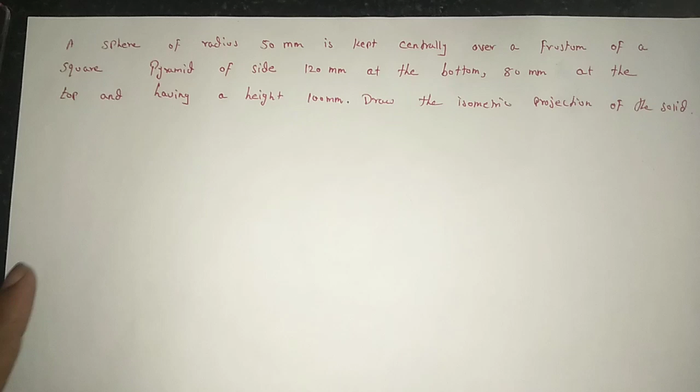In this video we are going to see one problem from isometric projections. Problem: a sphere of radius 50 mm is kept centrally over a frustum of a square pyramid of side 120 mm at the bottom, 80 mm at the top and having a height 100 mm. Draw the isometric projection of the solid.

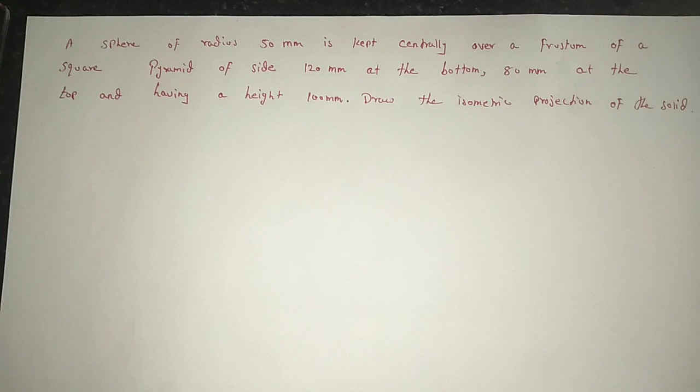They are asking: draw the isometric projection of the solid, combination of solids.

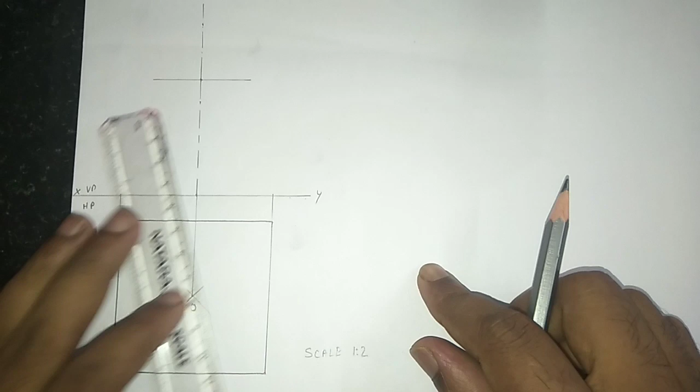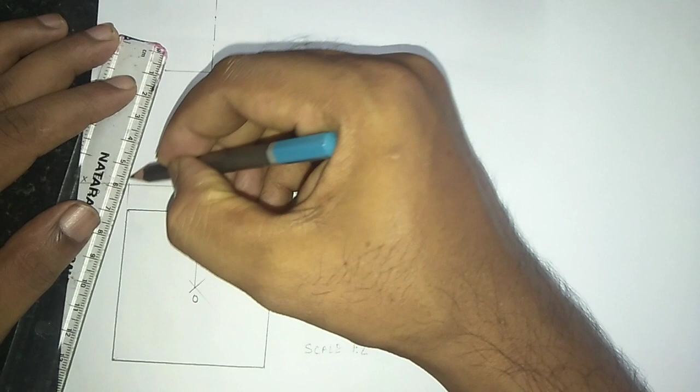Next I am going to connect these portions from this top of the frustum to the bottom of the frustum. So I connected the line. So now the front view of the frustum is over. Okay, so in the top view also we need to mention this top portion of the frustum in this diagram.

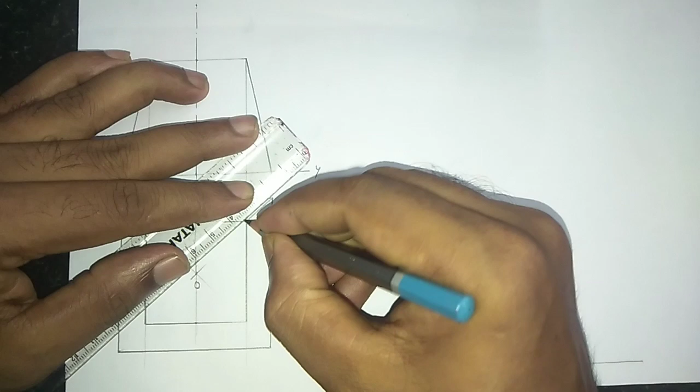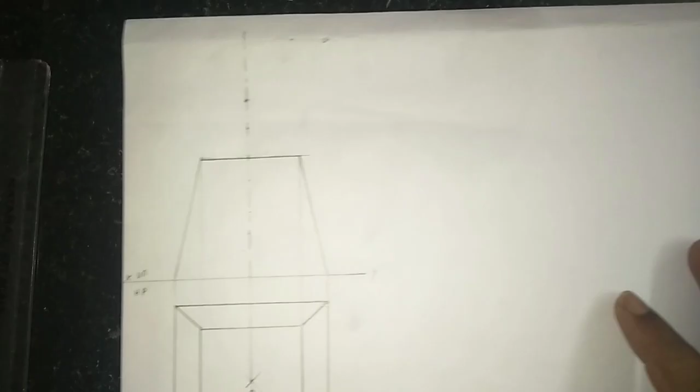So now the frustum portion, front view and top view is completed. Now over the frustum, the sphere is located. The radius of the sphere is 50 mm. Our scale is 1:2, so 50 divided by 2, 25.

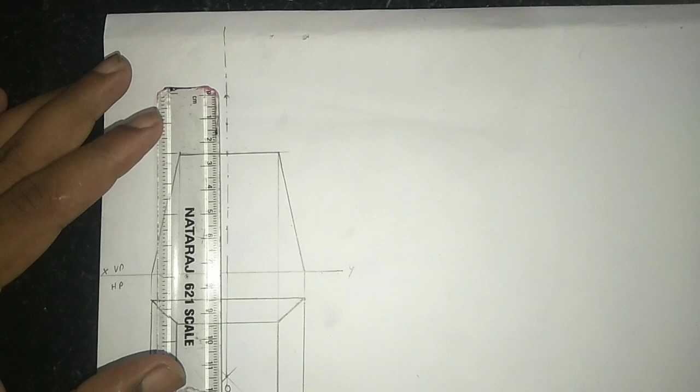Take the value of 25 radius in the compass and draw the sphere over the top of the frustum. Okay, so like this we draw the sphere over the top of the frustum and mention the dimension.

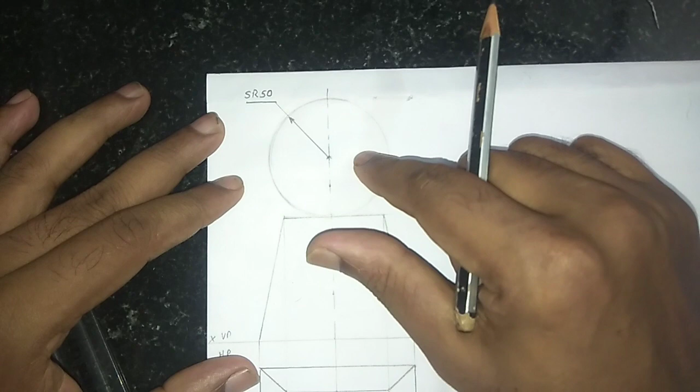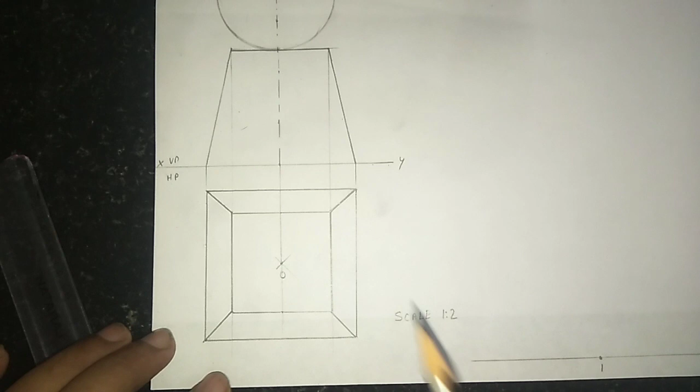The sphere radius 50 is the original dimension given in the problem. And next in the top view also we need to mention the sphere. Here in the top view the frustum only is available. So now we are going to draw the sphere over the frustum on the top view. So take the radius 25.

So place the compass in the center and draw the circle.

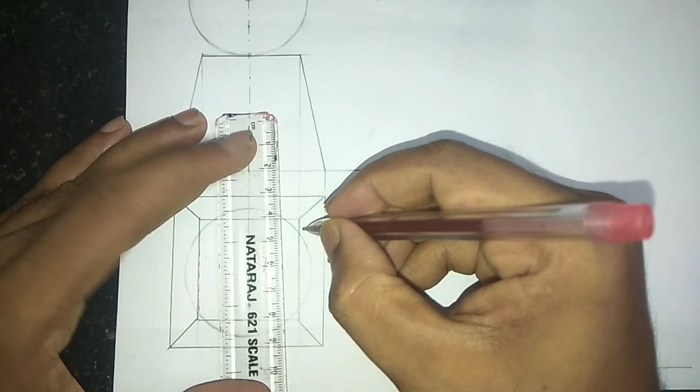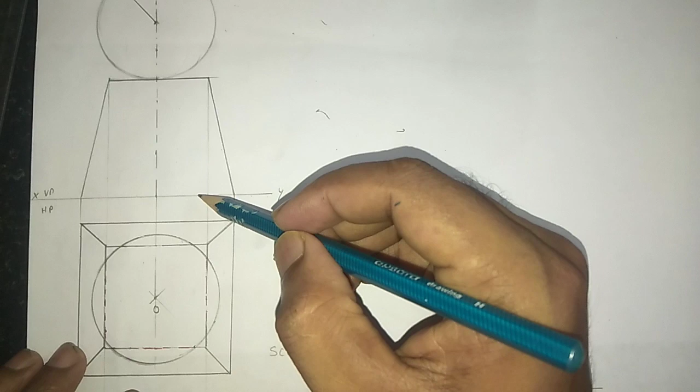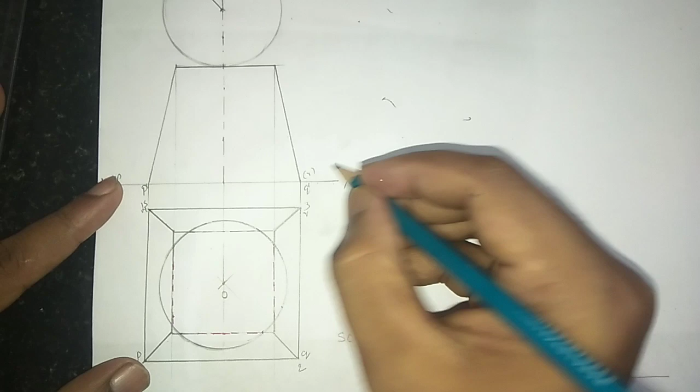So first draw one straight line, mention one point and give the number 1. And here also we are going to give the number on all the corners. So here 1, this is 2, 3 and 4, and also here give the naming on these particular corners. Here it is considered P, the base portion of the prism, P, Q, R and S. So here P visible, Q visible and R is invisible. P dash, Q dash, R invisible, R dash, and here S is invisible, S dash is invisible.

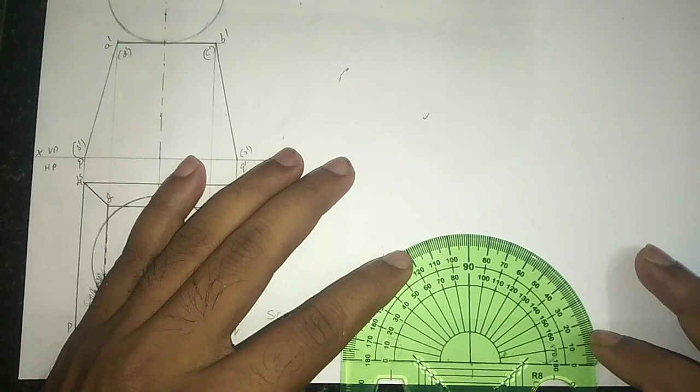And the top face of the frustum, here I give the name A, B, C and D. Here A visible, A dash, B dash, C dash is invisible and D dash is invisible. And here the center of the sphere is O dash, and here the center of the sphere is O. And now we are going to draw the 3D view. From the point 1 we place the protractor and take an angle 30 degrees on both sides, and connect the points by a straight line.

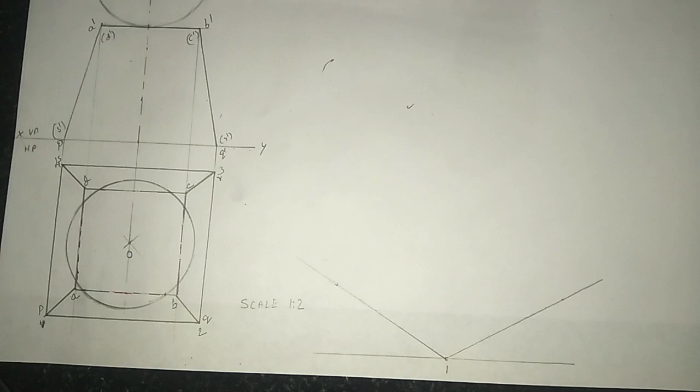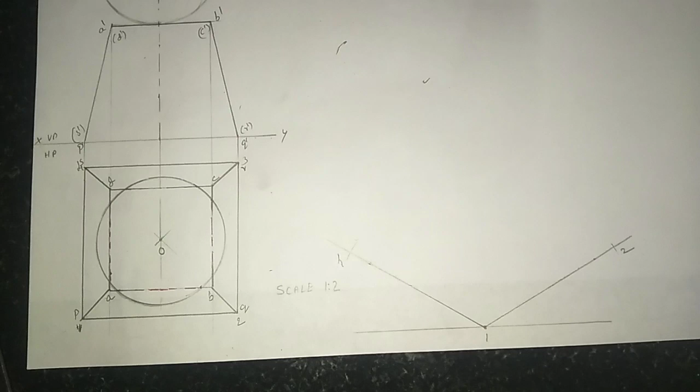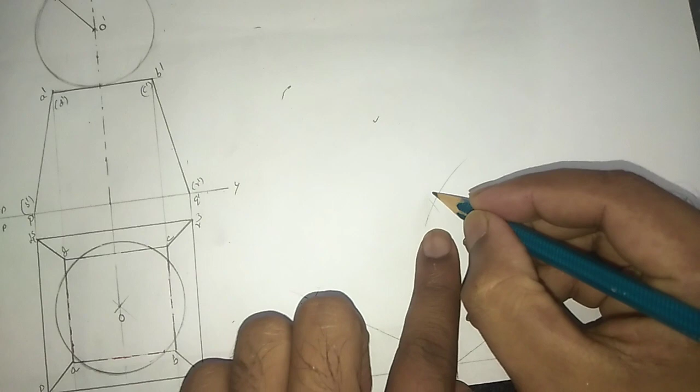And now measure the distance from 1 and 4, place the compass at point 1 and make the arc on both sides. And now we get the points 4 and 2. Here it is a square pyramid, so the bottom face has all sides of equal distance. So place the compass on 2 and make the arc, and place the compass on 4 and make the arc, and give the point number 3, and connect the points 3 and 4, and 2 and 3.

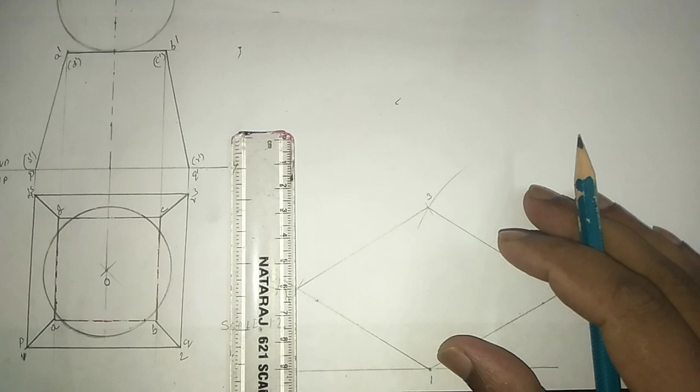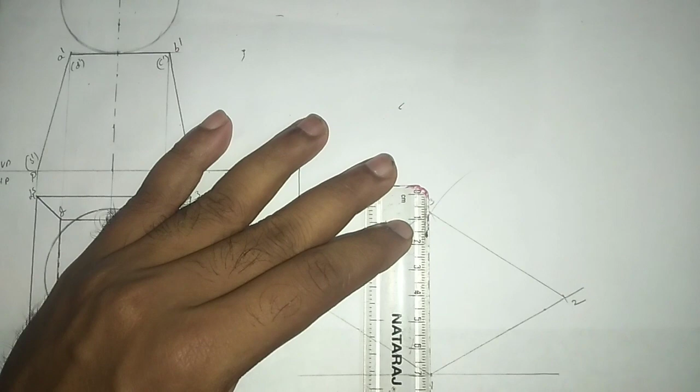Now from all the points we need to draw one vertical line. The height of the line is the truncated height of the frustum of the pyramid. The height of the frustum of the pyramid is 100 mm. That is given in the problem, but we reduce the scale. The scale is 1:2, so for 50 mm height we need to draw the diagram. Draw the line 50 mm from all the points. So from all the points the 50 mm line is drawn.

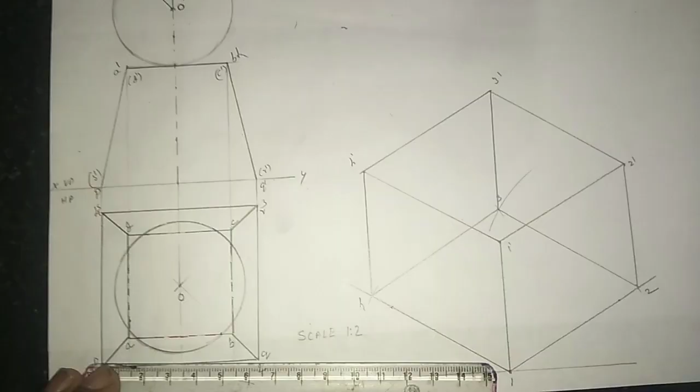So here this is the point number 4 dash, this one is 1 dash, this one is 2 dash, this one is 3 dash. Now connect all the points 4 and 3, 2 and 3, 1 and 2, 1 and 4. So in the diagram the base portion of the pyramid is drawn. Point 1 is P, point 2 is Q, point 3 is R, and point 4 is S. So the base portion is drawn. Now the top face of the pyramid has to be drawn.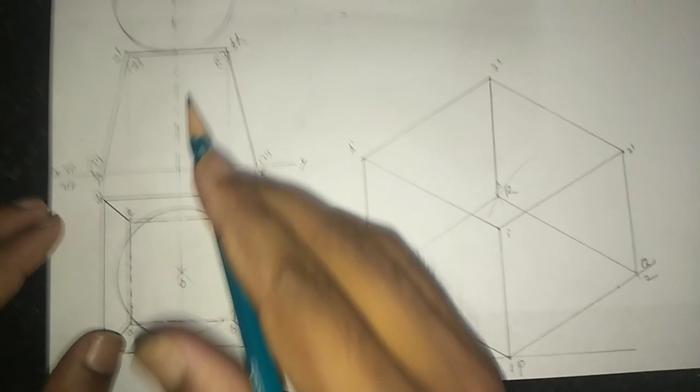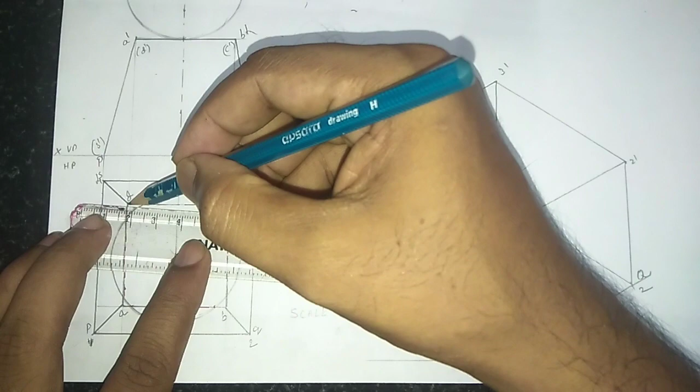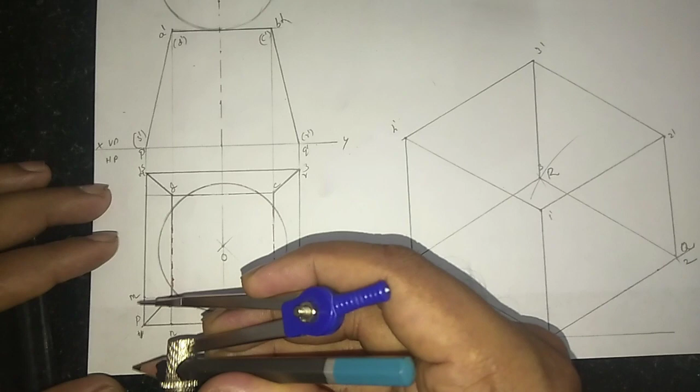So for that, I measure the distance from point A. Draw one straight line from point A, and from point D also draw one straight line, and from point A to the bottom draw one straight line. Now on the line 1 and 4, at this place I give the name M, and on 1 and 2 I give the name N. Now measure the distance of 1 and M using the compass. M is on the line 1 and 4. Place the compass at 1 and make one arc here.

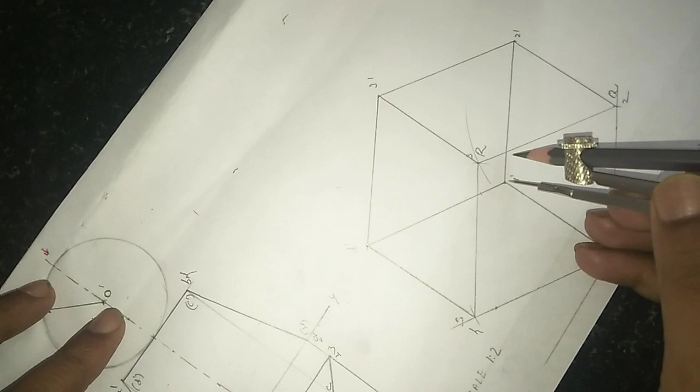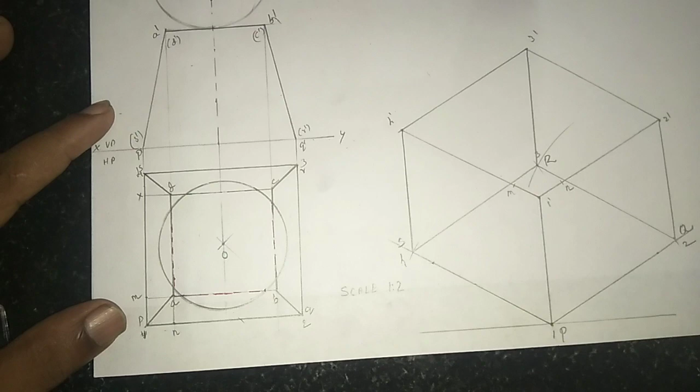So this is the point for M, and measure the distance of 1 and N. Both are the same value. So place the compass at point 1. N is located on the line 1 and 2. So here I mark the point. This is the point M, and this is the point N. And here also I give the name X. X is located on the line 1 and 4. So measure the distance of 1 and X.

The same value only here. So measure X, which is placed on the line 1 and 4. 1 and 4 la என்ன பண்ணோம், mark the point X. So here X, and also here this point is Y. I give the name Y. Y is located on the 3 and 4 line. 3 and 4 line la Y இருக்குது. So here I mark. So this is Y.

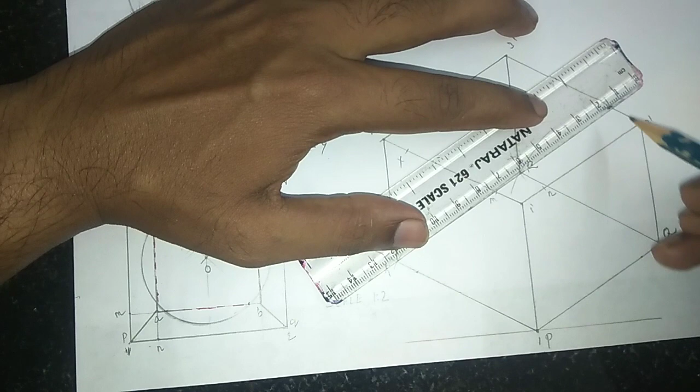And now I am going to draw one line parallel to the line 1 and 2. From the point M, I draw one straight line which is parallel to the line 1 and 2. Draw a very light line. Light or line draw பண்ணிக்கங்க.

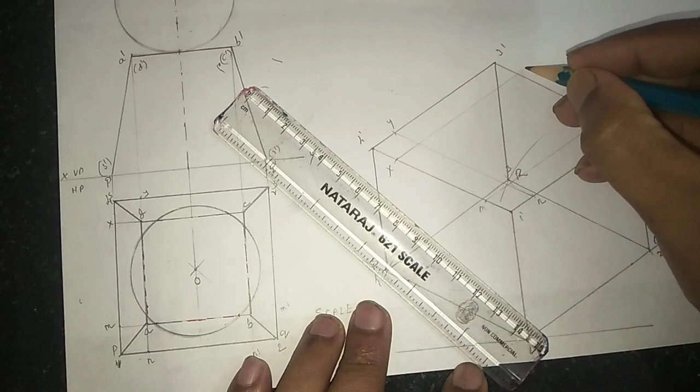அதே மாதிரி from the Y, connect Y and N. Also you connect the Y and N points. அதே மாதிரி என்ன பண்ணணும், in this side from point 2 ல இருந்து இங்கே we can give here the name N dash, here M dash. Here also, this side also we need to mark. So this name we can give M dash, and for this we can give the point Y dash.

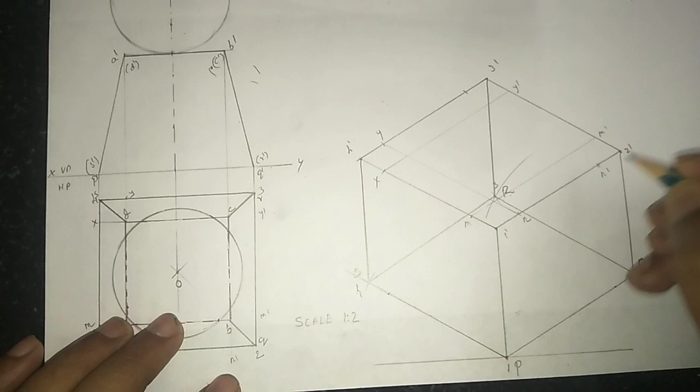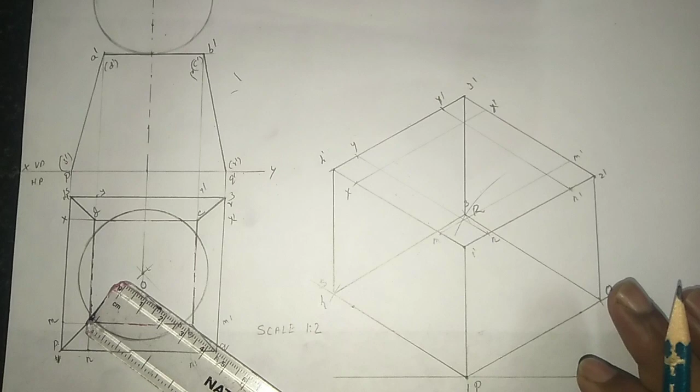And here also we mark the point from the 3, and here mark the point. Here we give the name N dash, and this one is, sorry, this one is X dash. This one is Y dash, and connect N dash and Y dash. So now we connected. Now we are going to draw the top face. In between, this intersection is the top face of the square prism.

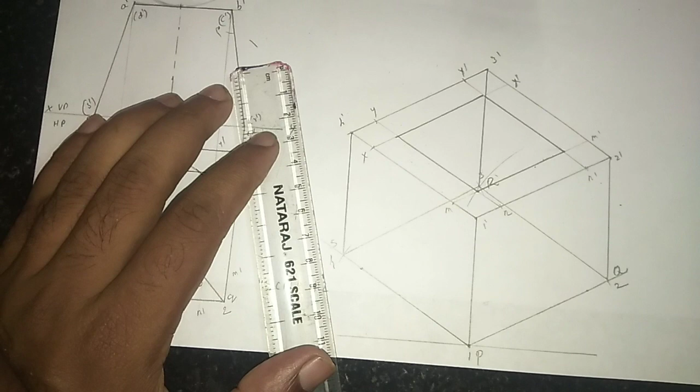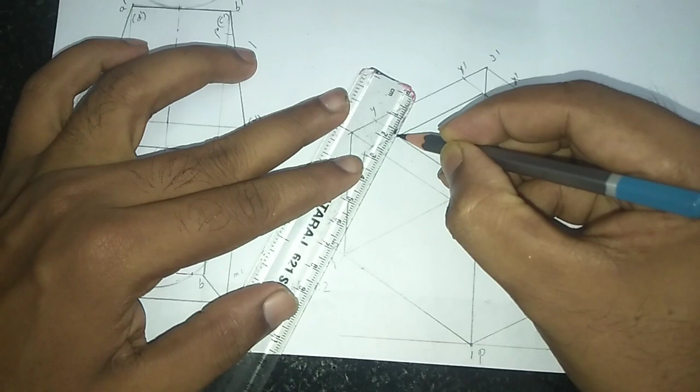Okay, so now we darken this portion. Connect these points. Darken these portions. It's a square pyramid, not a prism, the frustum of a pyramid. We need to connect this point to this fourth point by a slanting line. It is visible. And next point, this point.

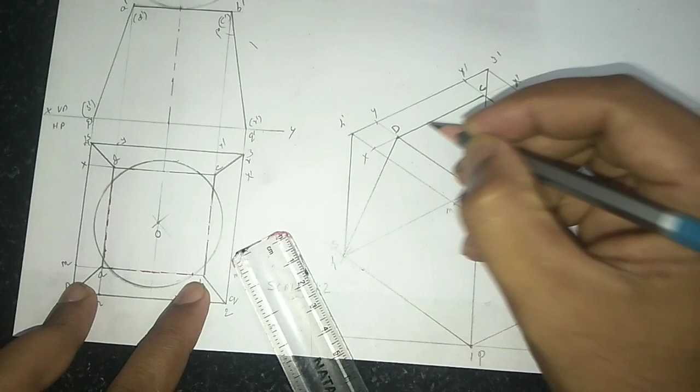So the top face, the name is here A. A is located at this place, nearer to point number 1. This is A, and this one is B, and this one is C, and this one is D. Nearer to 4, the point is D. Nearer to 3, the point is C. Nearer to 2, the point is B. Nearer to 1, the point is A.

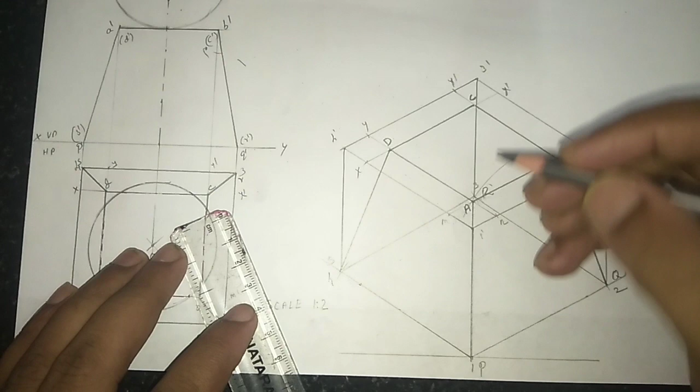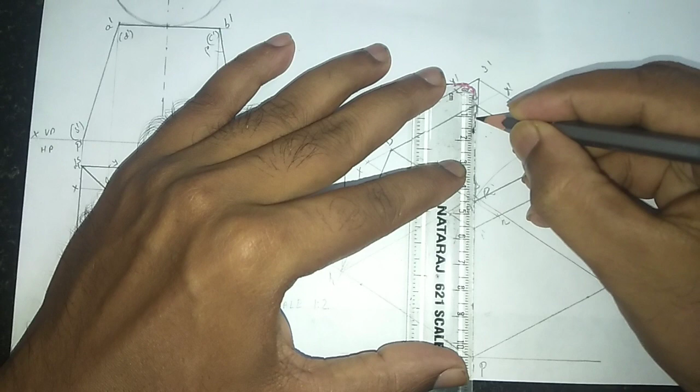And connect A and P with a dark line. Connect B and Q with a dark line. On the back side, the line C and R is invisible, so we need to draw a dotted line from C to R because it is invisible.

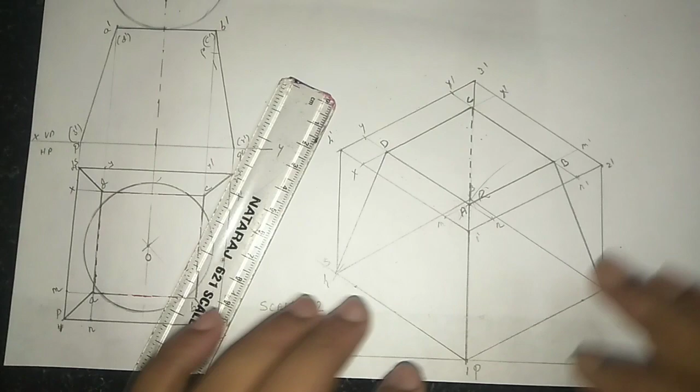So next we are going to draw the sphere over this frustum of the square pyramid. So அதுக்கு என்ன பண்ணணும்னா, first we need to draw the diagonal line D and B.

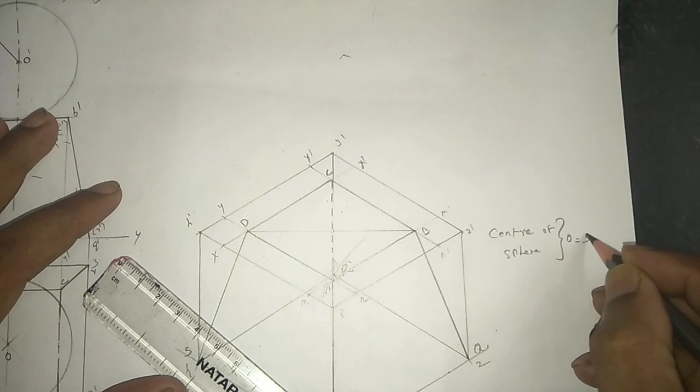The radius of the sphere is 50 multiplied by the isometric scale. Here this problem is isometric projection, so we need to multiply with the isometric scale 0.82. We get the value 41 mm. 41 mm is the center of the sphere from this diagonal point.

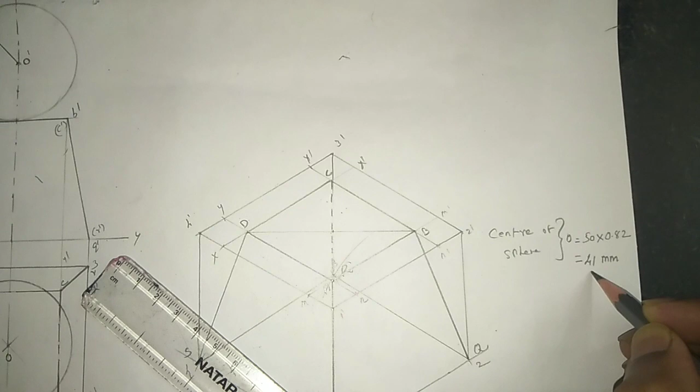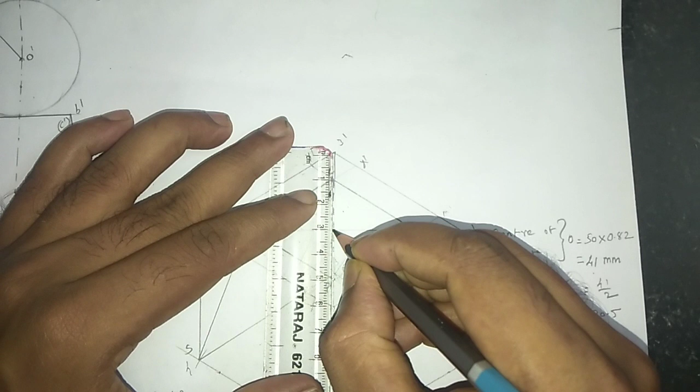ஓகே, so for that we need to divide by 2. 41 divided by 2 is 20.5. So from this point we mark 20.5 mm. So exactly it comes at this place. So 20.5, and take the compass.

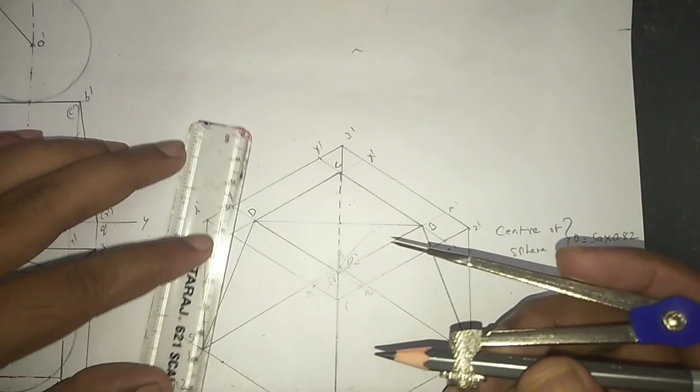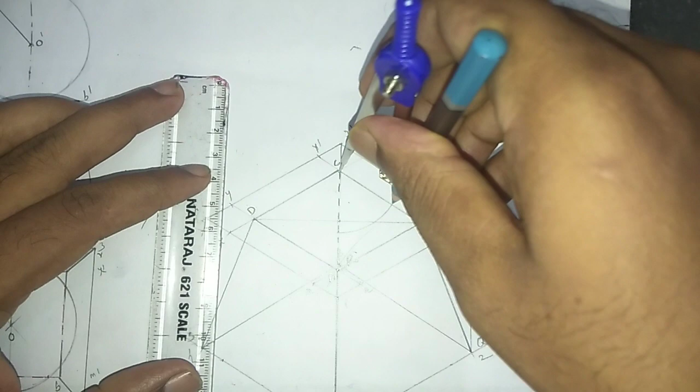The original radius of the sphere is 50. நம்ம 1:2 ஸ்கேலுக்கு ரேடியஸ் 25. So take 25 mm in the compass, place the compass here and draw the sphere. And finally we need to write the original dimension. Here the sphere radius is 50, the original value given in the problem.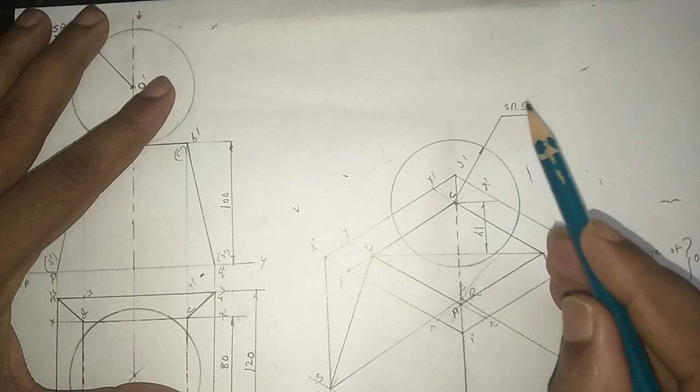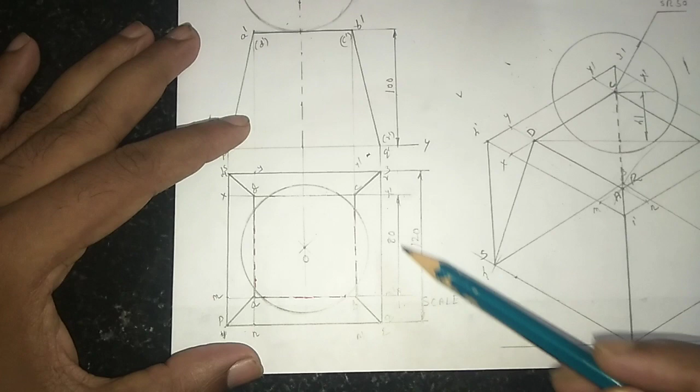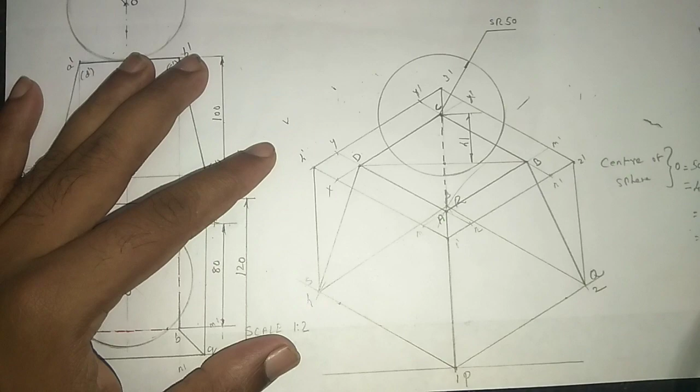And in the top view also we need to write the original values. This is the 3D view of the object, and over the top of this diagram we can write isometric projection. And in the bottom, all dimensions are in mm. And the question ல isometric projection கேட்டதனால isometric scale draw பண்ணி காமிக்கணும்.